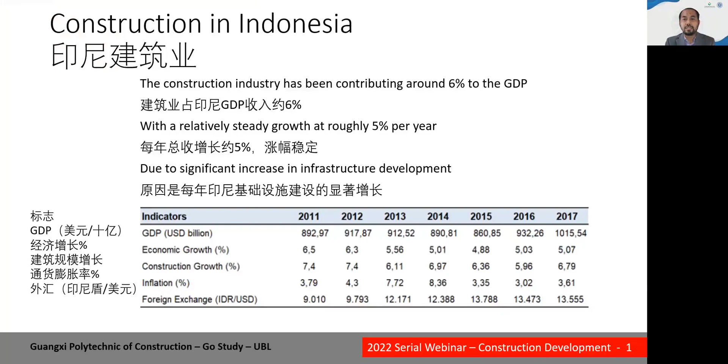Investment in construction increased from 2009 to 2014, reaching around 65 billion US dollars. Then it increased again with higher numbers from 2015 to 2019, around 95 billion, or on average around 24 billion per year. In 2019, these numbers went up to 29 billion US dollars in one year.

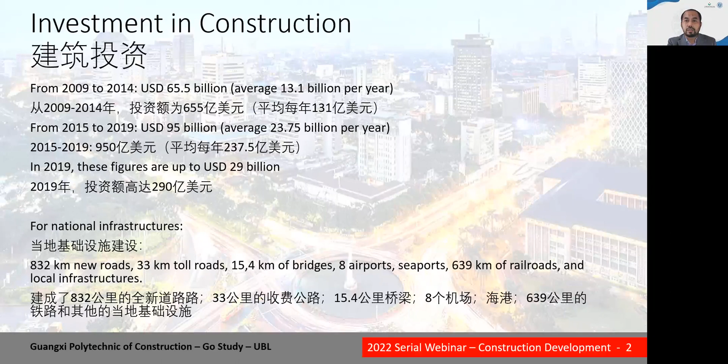It was spent heavily on national infrastructures such as new roads, toll roads, bridges, airports, seaports, railroads, and other local infrastructures.

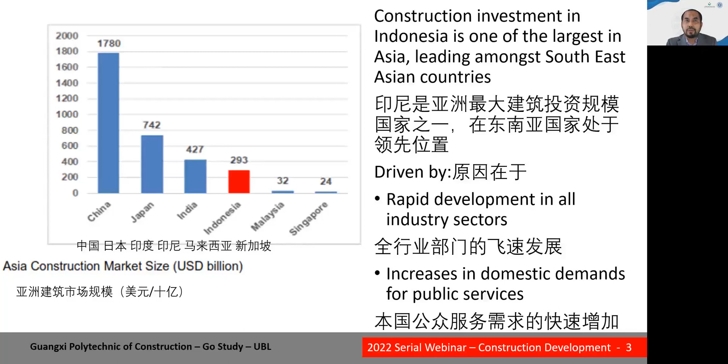Construction investment in Indonesia is one of the largest in Asia, leading amongst Southeast Asian countries, driven by rapid development in all industry sectors and the increase in domestic demand for public services. You can see on the charts the position of the rate of investment in the Indonesian construction industry.

Public infrastructure investment was part of the government's 5-year strategic development plan from 2015 until 2019, aiming to spend up to around 251 billion US dollars for strategic infrastructure development, and 110 billion US dollars for basic infrastructure development or programs.

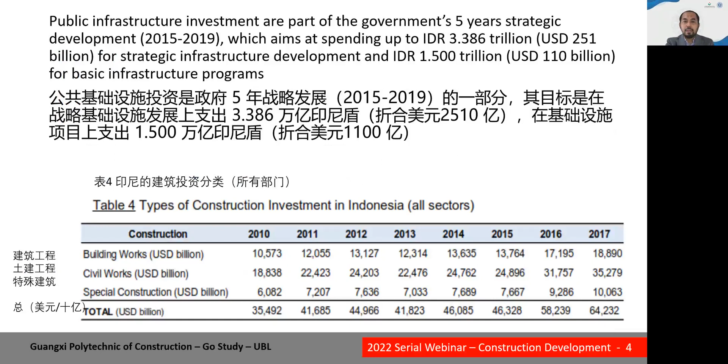Constructions by the private sector are mainly on energy infrastructures, such as building oil refineries, and then transportation, toll roads, real estate or property, and also commercial buildings.

Due to limited public funding, the government is actually encouraging the private sector to engage in public-private partnerships, or PPP. Here I would like to give an example of notable private sector investment, which includes the Jakarta-Bandung high-speed rail, in the form of B2B between China Construction and Railways companies and state-owned companies of Indonesia.

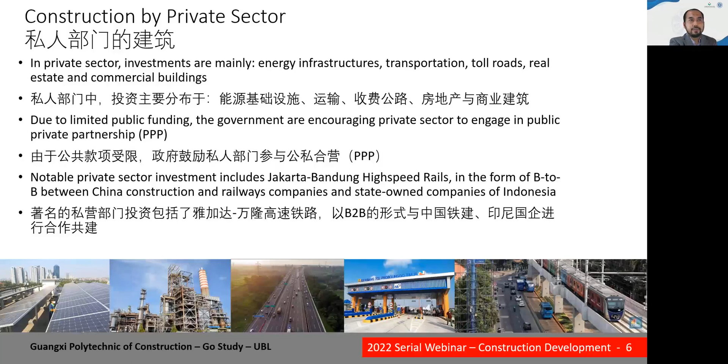So in regard to its business environment, the number of contractors in Indonesia is rather very high. In 2016, the total registered companies were around 141,959.

However, only 3% of that, or around 987 companies, were large, and only 8%, or around 18,631 companies, were medium. So the rest are small companies.

But unfortunately, most of the small construction companies are unable to sustain in this business, and their value accounts for less than 10% of the construction market. This is mainly because infrastructure projects tend to be very capital intensive, which is not favorable for small contractors.

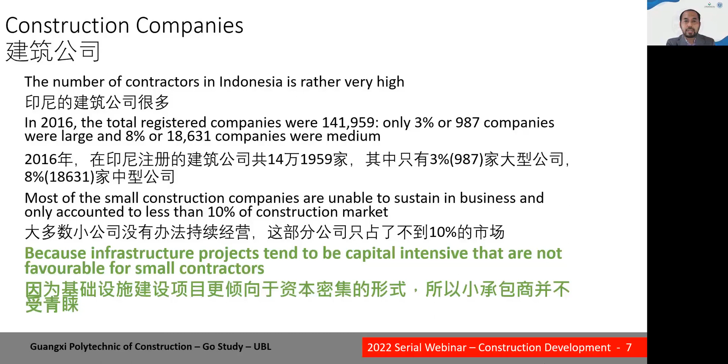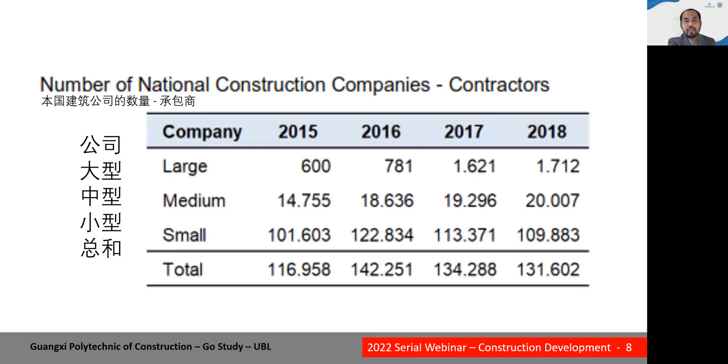You can see also these numbers in this table, showing that small contractors are actually more numerous than large or medium ones, but they only account for a very small percent of the business, and are very unlikely to survive.

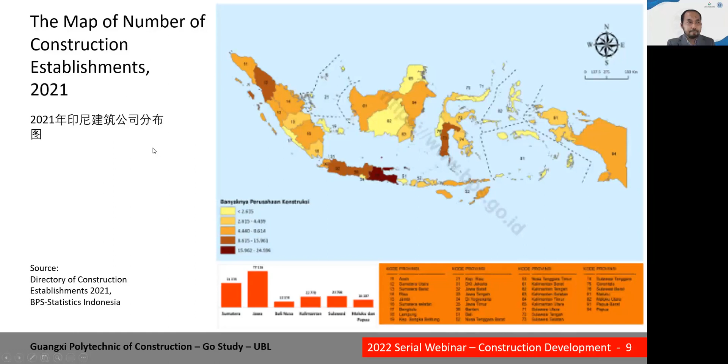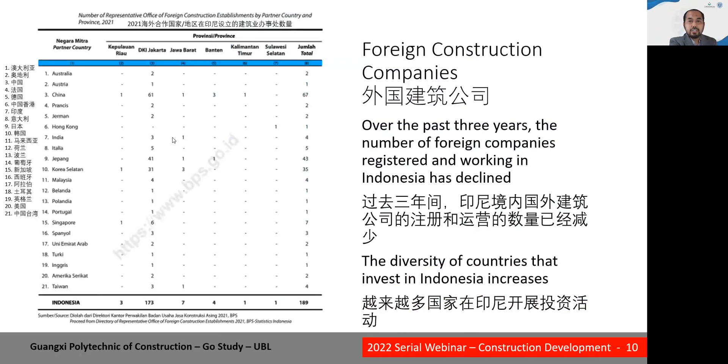Furthermore, over the past 3 years, the number of foreign companies registered and working in Indonesia has declined. Meanwhile, the diversity of foreign countries that invest in Indonesia has increased. China remains the country with the most construction companies in Indonesia, followed by Japan and South Korea.

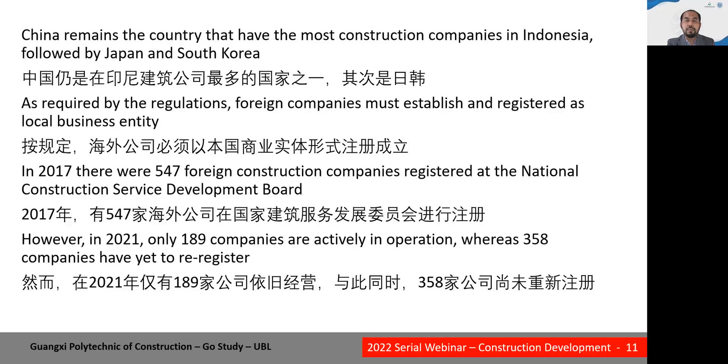As required by regulations, foreign companies must establish and register as a local business entity. As of 2017, there were around 547 foreign construction companies registered at the National Construction Service Development Board in our national government. However, in 2021, only 189 companies are actively in operation, whereas the other 358 companies have yet to re-register.

Moving to the next slide. In regard to the human resources for construction industry, the total number of people working in the construction sector has increased in the last 5 years. On average, construction employs around 7% of the national workforce. By the year 2017, over 1 million were employed permanently in construction, and 7.6 million as free laborers, contributing to almost 2 billion man-days of construction work.

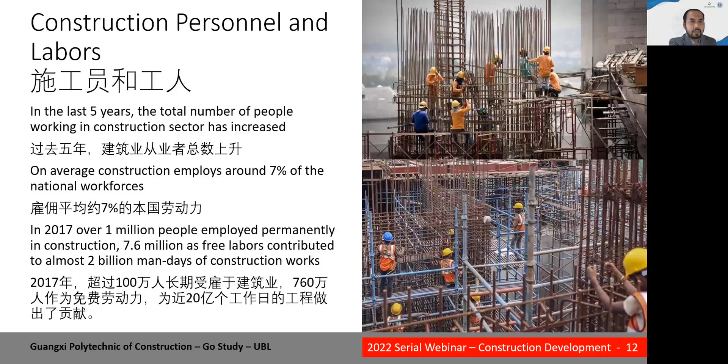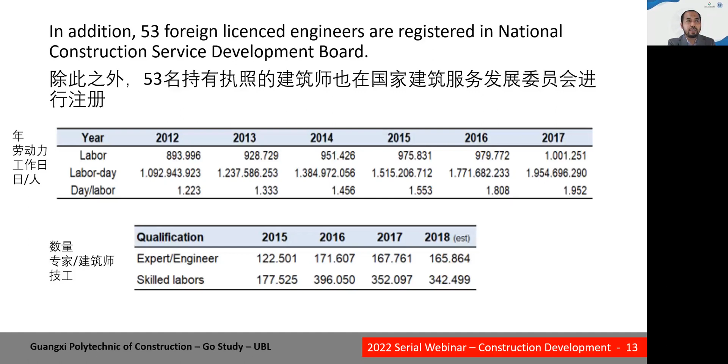So after describing the background, I will continue from now on to share about the opportunities in our construction industry.

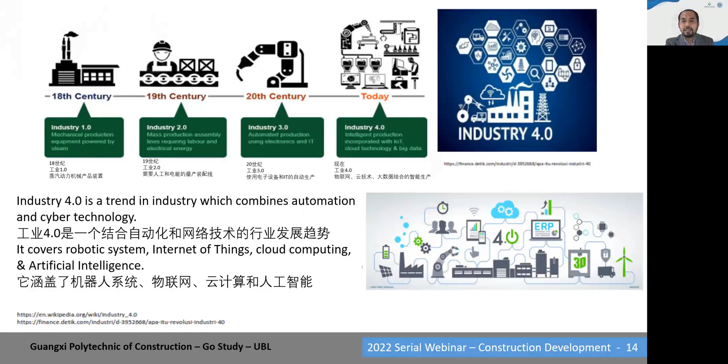First is higher definition surveying and geolocation with drones and advanced satellite images. Another one is 5D building information modeling, which will improve project cost management. Next is digital collaboration and mobility, which includes various implementation across all stakeholders.

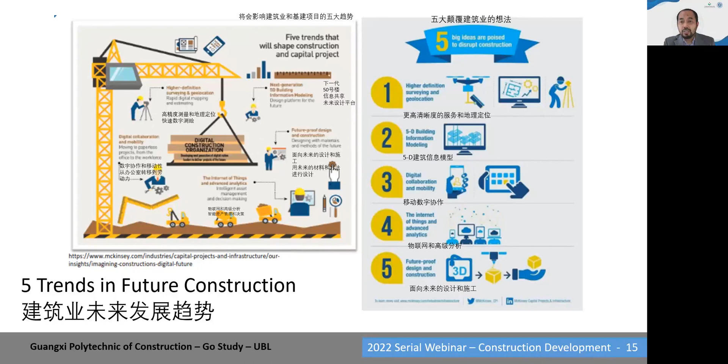The fourth is the Internet of Things, or IoT, and advanced analytics that can change our marketing and management strategies. And the last is future-proof design and construction, which means designing with future materials and methods.

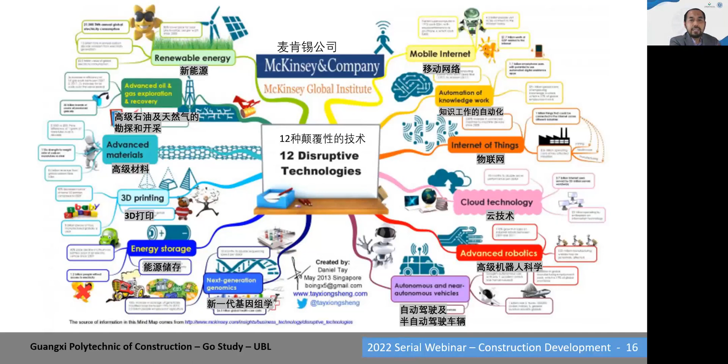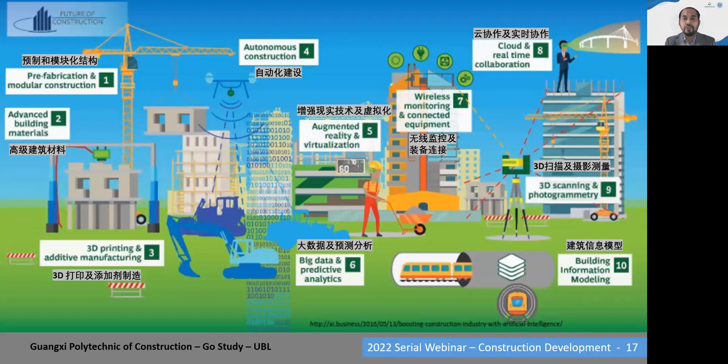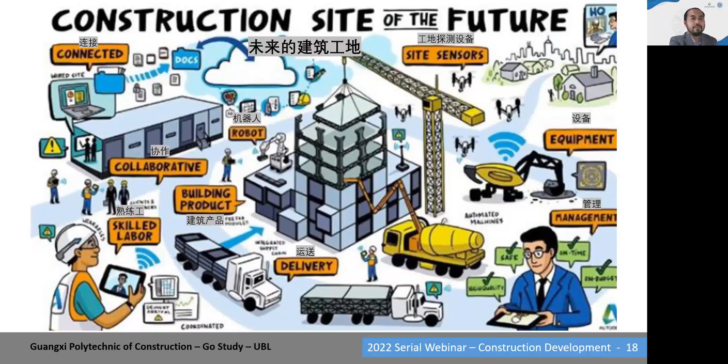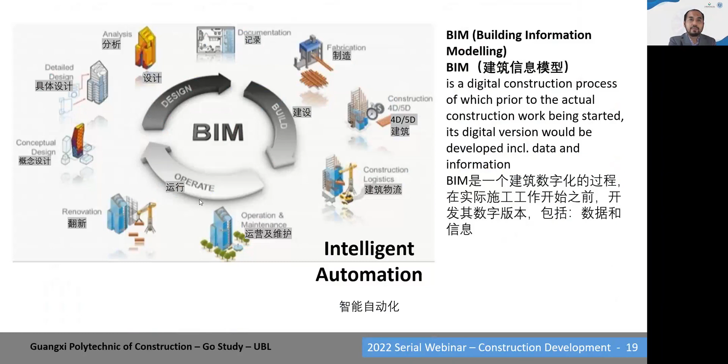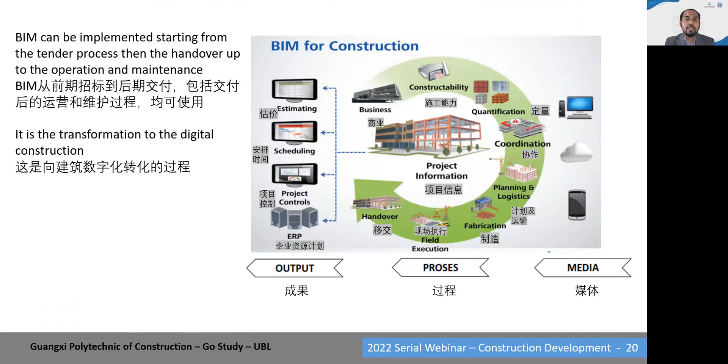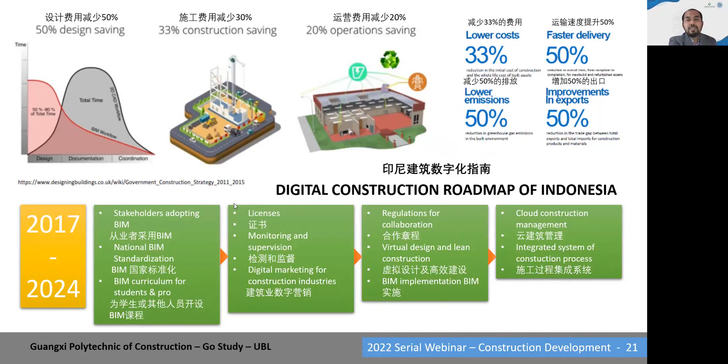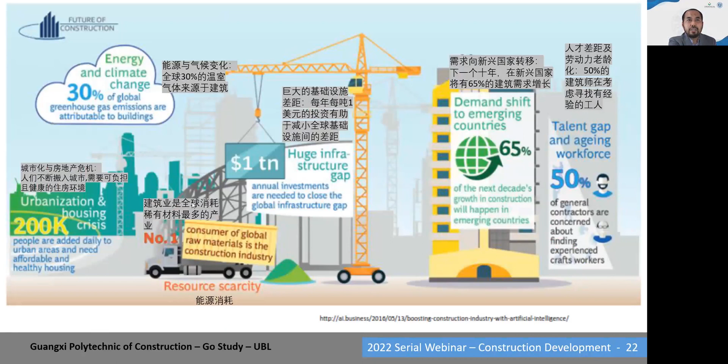Well, that is the ideal plan, but along the way we have started facing issues. As you can see on this slide, there are still many issues, and I would like to dig a bit deeper into these issues in the following section.

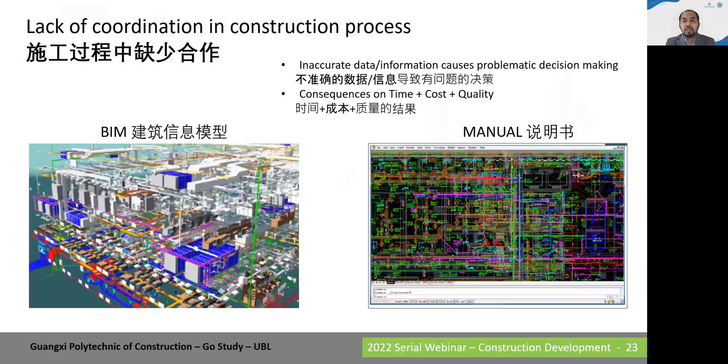So in this section, I will share more on issues and challenges, starting with the issue of lack of coordination in construction process, such as inaccurate data or information could cause problematic decision making. Then there will be consequences on time, wasting of time, cost overruns, and also quality can be lower than planned or expected.

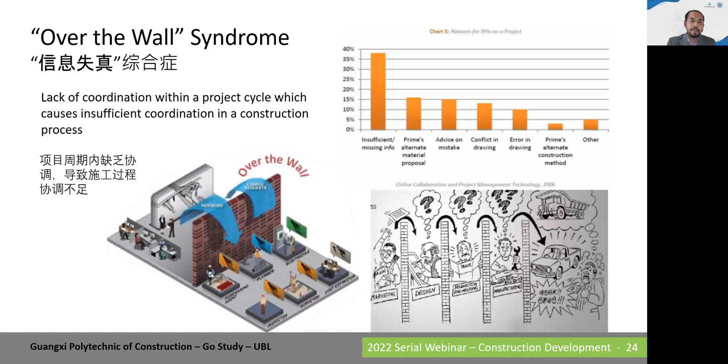We could also find the over the wall syndrome, meaning lack of coordination within a project cycle, which could cause insufficient coordination in a construction process. So if that happens, you can see this slide here that shows you what is happening with every stakeholder on the construction industry.

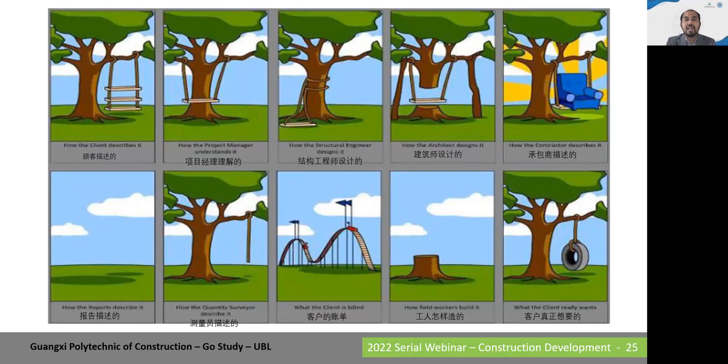So there are also some other issues on construction projects: inaccurate time and work estimation, poor site management and planning, shortage of construction materials, delays due to lack of coordination with vendors, consultants or contractors, inappropriate equipment, changes on design modified along the way, and change orders or variation orders.

And so having all those issues, research found that the construction industry is less productive than other sectors. And the construction industry is also late to adopt digitalization.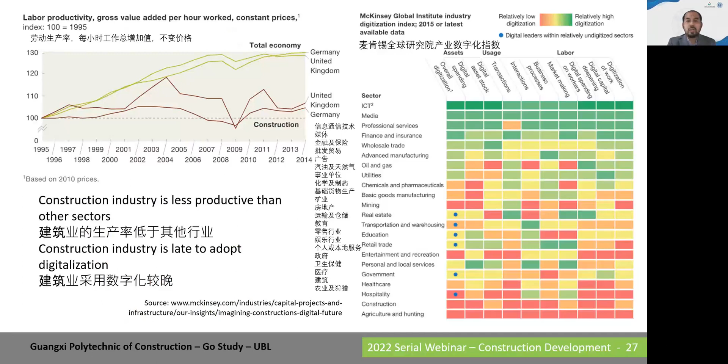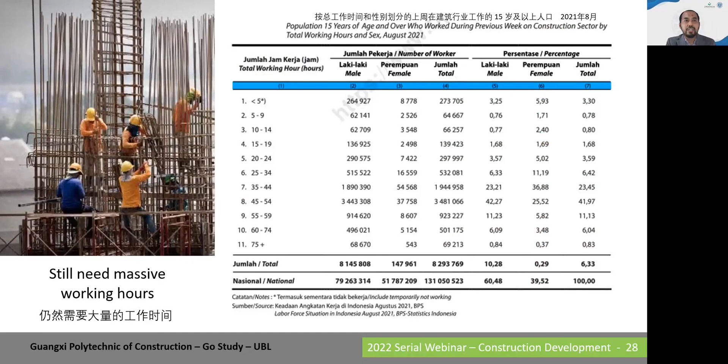Our construction industry, in our context, still needs massive working hours. Here you can see the data from Indonesian practice showing that man hours are still huge and increasing. And it is also still dominated by non-digital workers, the manual workers. So this is the condition.

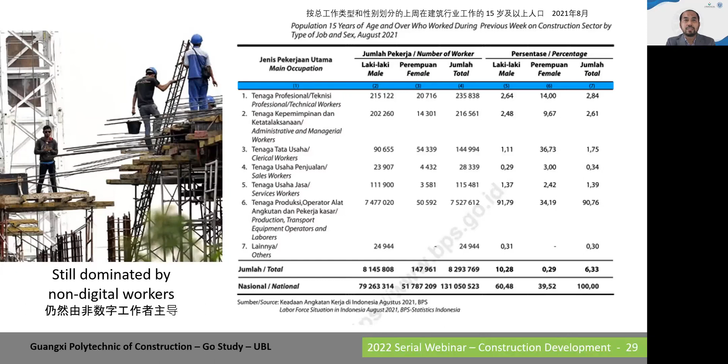It's very difficult to suddenly transform to digital-based construction. So lastly, the conclusion part. Hopefully I'm not going too fast, but if we have more time, I think it's good because we can have more discussion.

Lastly, I would like to share some outlooks from my presentation. So despite the dynamic global economy and political situation locally in Indonesia, the construction industry is expected to continue to grow in years to come. As you can see, we still have a new capital to be built, and our need for infrastructure, especially on transportation, and we still have a lot that needs to be constructed.

And then the construction industry invites more collaborators and complexities required by global development trends, meaning that we might have to implement new technologies, new standards, for example regarding safety and so on, required by the industry globally. So it will be more complex, and we have to collaborate with more stakeholders.

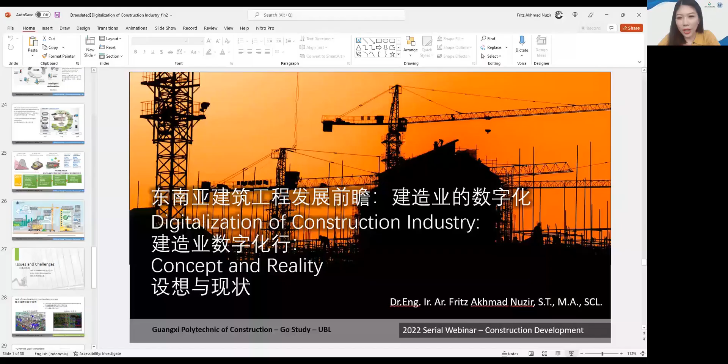Okay, thank you, Dr. Fritz. Thank you for your meaningful sharing. So let's move to the Q&A session, and let's see what kind of questions the students have.